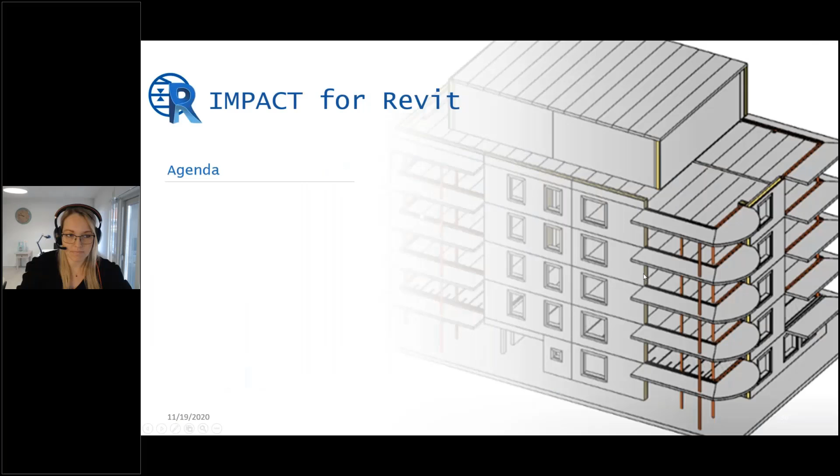So let's see what this presentation is about. We're going to start with the wall, the most popular precast element among our users in Impact. This time we're going to focus on reinforcement in Impact Revit for walls, instead of modeling.

I guess a lot has been said about modeling already, we've been working a lot on it. Now we take it a step further and try to see how to ease the reinforcement part.

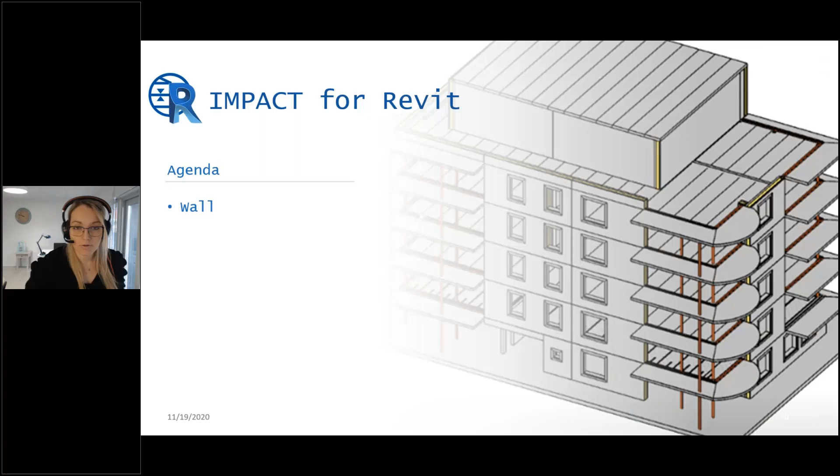We're also going to talk about the double wall. The double wall is what we called the last missing diamond of the Impact Revit crown. It was the last missing diamond.

But then back in September, we released modeling functionality for double wall. We continue working on it, and I would like to show you some highlights you might already be using when we talk about double wall functionalities.

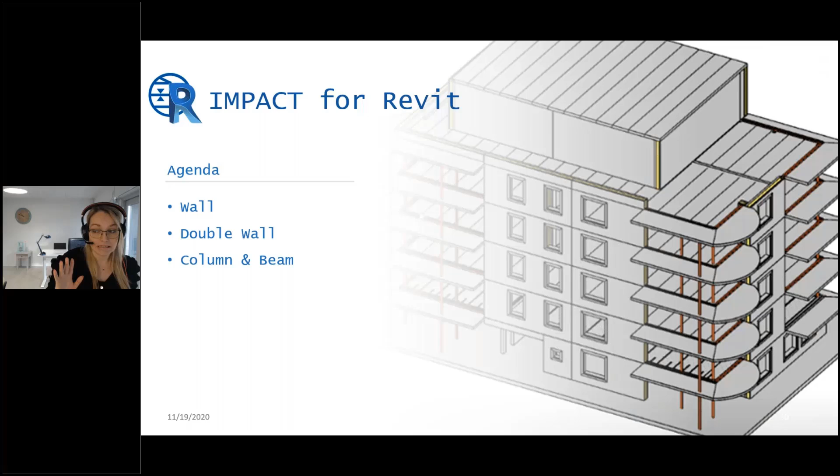We can, of course, not go without column and beams, and here I will show you a feature that a lot of you might have been missing. It's already there, and I'd like to show it to you so you can make use of it if you haven't found out yet.

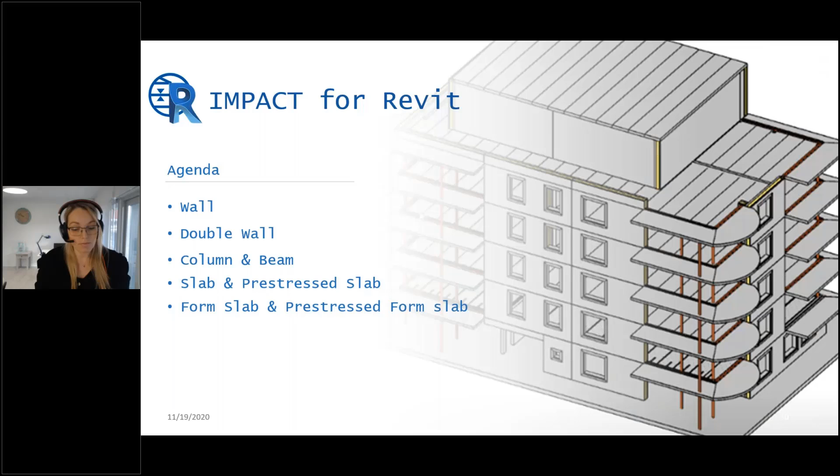Then I'm going to focus on slab, form slab, and their respective pre-stress versions. As quite popular elements, I'm going to talk again about advanced reinforcement possibilities in slabs and modeling. Those are elements that need to be designed fast and effectively, and we put a lot of effort into our functionalities there. I want to show you some highlights.

Yes, we cannot go without shop drawings either, an inevitable part of each precast model. So here I'd like to show you how to copy a shop drawing in Impact for Revit, a new functionality that came because of you. You asked for it, and we worked on it during this year.

And we're also going to talk about how to connect the shop drawing in Revit with the rest of the Impact software, for example, setting drawing statuses.

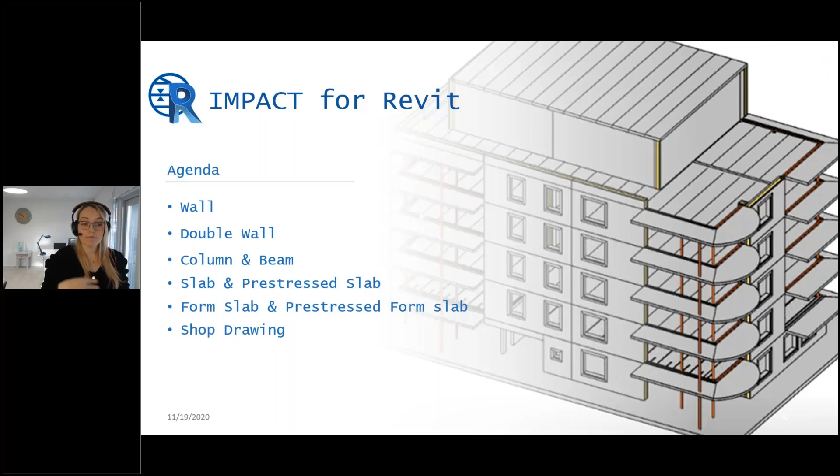Last but not least, collaboration is on our list of topics. I'm going to show you some tips and tricks about collaborating with Impact Revit models in Impact 16. In the end, we have around 35 minutes for this presentation, and we're going to have time for questions and answers.

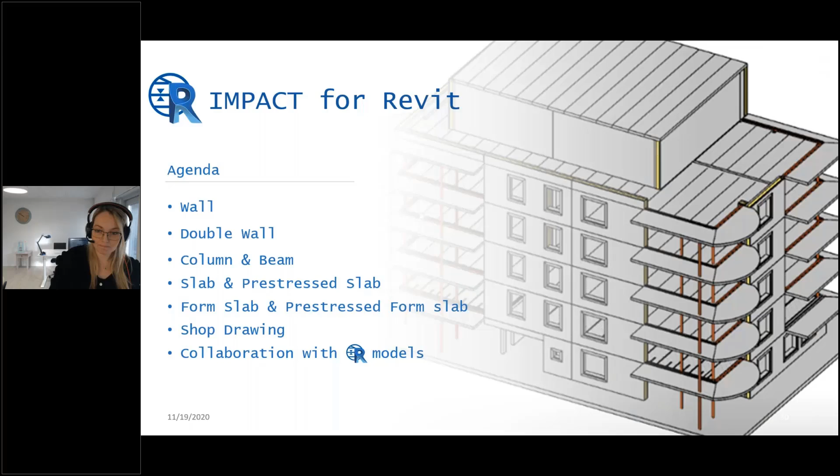But let's start, let's not lose time, and begin with the first topic: the wall. I'm going to rearrange my screen like this, and then we are ready to go. As I said at the start, this time we're going to talk about reinforcement boundary in walls.

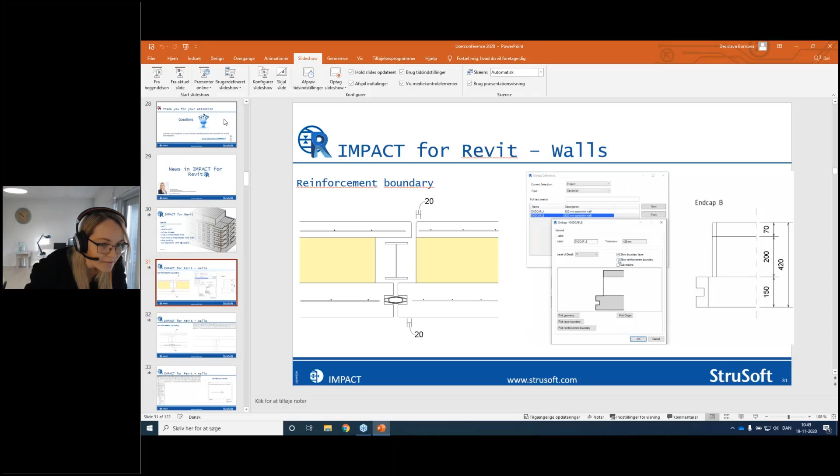There is some kind of delay. I don't know if you can see it on your screen, I'm going to try again like this. Now I think it's going to work.

The first topic I want to talk about walls is the reinforcement boundary. Let's see the problem a lot of Revit users face, which has a lot to do with reinforcement. I've taken an example with quite a challenging shape, but also quite typical for a precast element. We need to insert a place for insulation material, a place for a column, and adjust the shape of the inner and outer panel.

We need to stop the reinforcement 20 millimeters before the edges of the element, respectively the load bearing and the facade. What Revit users see as a challenge is that there are limitations in the Revit software, because you have cover settings, but they take the outer edge of the element, which obviously is not going to work in our case.

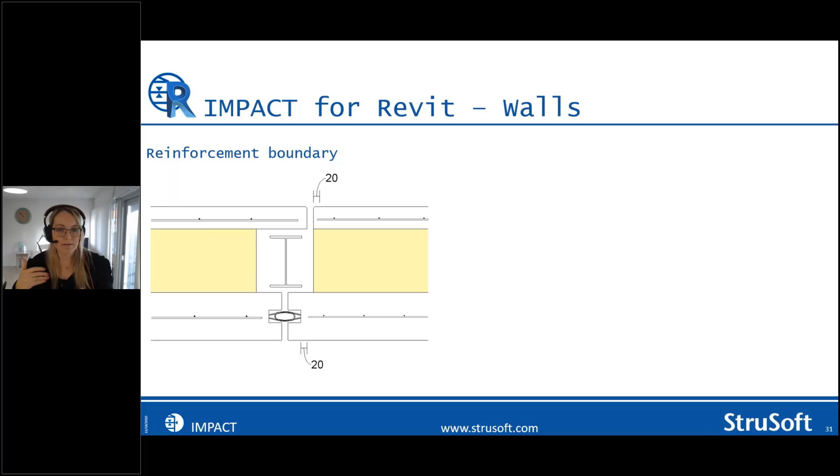So we said we need to optimize this setting of reinforcement and cover settings. We've done that a lot in Impact. Impact for CAD has history for solving this problem with reinforcement boundaries, and this is what we also implemented in Revit, seen with the Revit tools. Now we combine Revit tools with Impact tools.

What we do is, of course, make an endcap - that's the shape of the wall. That's one of the most powerful tools the designer has in Impact. We make the edge with the help of the endcap, and here I have endcap B, as I call it.

What I can do is define the thing called reinforcement boundary. I can say that whatever reinforcement from the reinforcement templates in Impact, they can stop where I decide - in this case 20 millimeters.

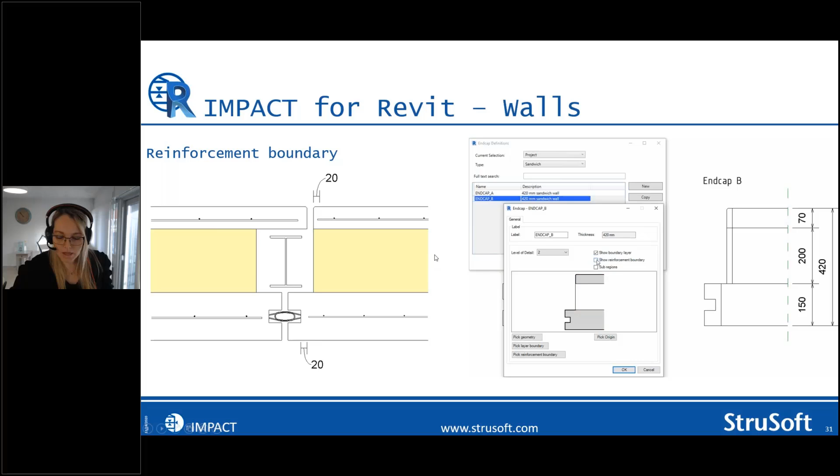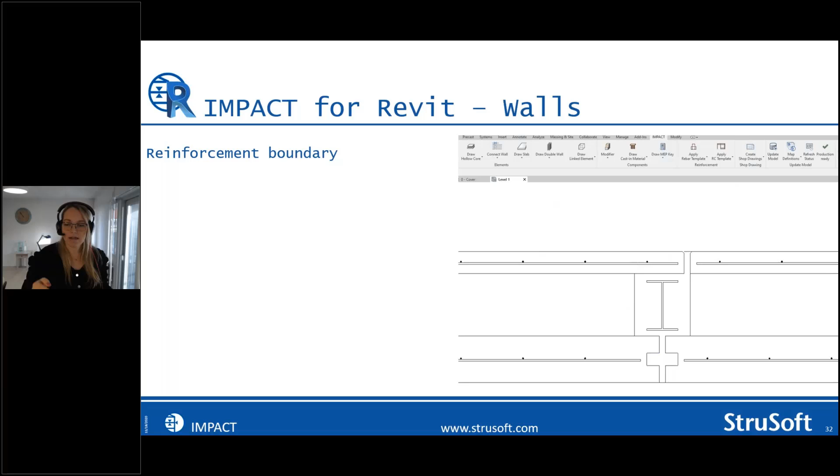So once I go and define the reinforcement template, I can just apply it. It's a template that consists of a mesh, edge rebars and opening rebars. Then you can see that's the result - it's going to adjust to the shape that I have given. It's going to look like this.

If we see from a top view, it's a see-through view, so we can see the casting material, we can see the mesh. And in Revit, as a visual software as it is, we have a lot of possibilities to measure, but also to adjust according to it.

One of the great parts about this reinforcement template endcaps - you can also do a casting material template - is that it all can be saved in your Impact database and can be reused from the database. If you already have them in your standards, in your Impact standard, you can also reuse them now in Impact 16. So try it out. If you have issues reinforcing or adjusting the mesh in a precast element, take and try this one, the reinforcement boundary.

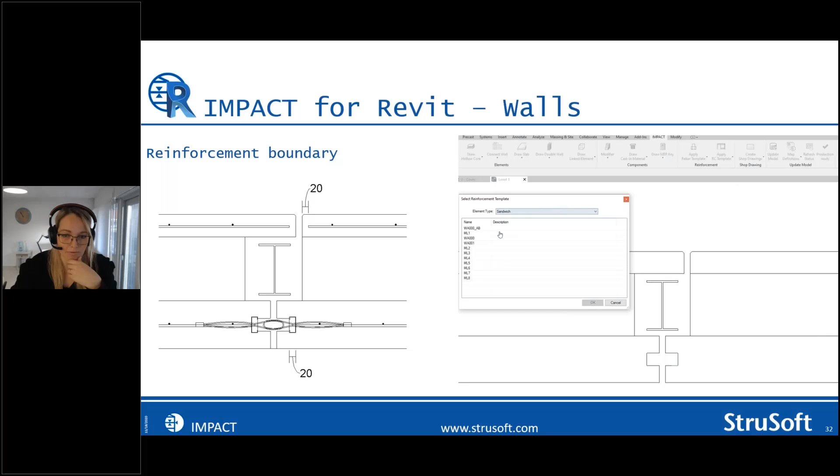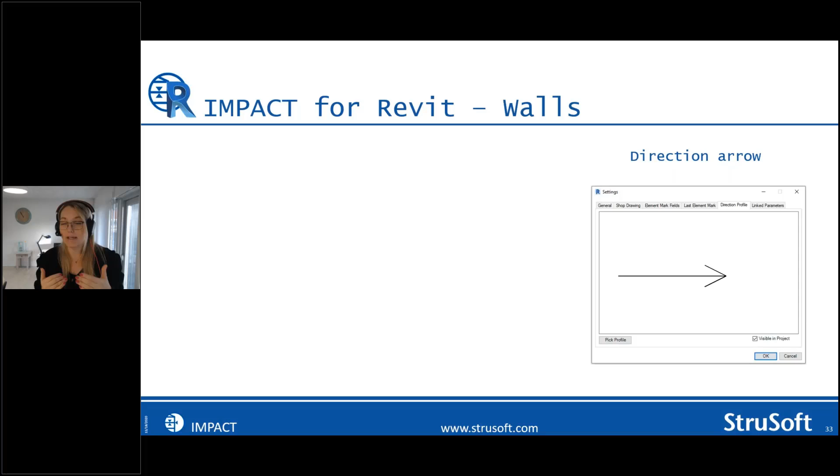Another setting which I know a lot of you have been waiting for is what we call the direction arrow. It's more like a visual guidance to where the sides of the precast elements are. Why do we need to see the sides of the element? It's because in Impact, we as designers need to know, to define from early stage, where the element mark, the name of the element, will be on our drawing. Because later on this will also define from which side we see the element on the shop drawing, but also how the element is going to lie on the precast bed. So for me as a designer, that's very important to know.

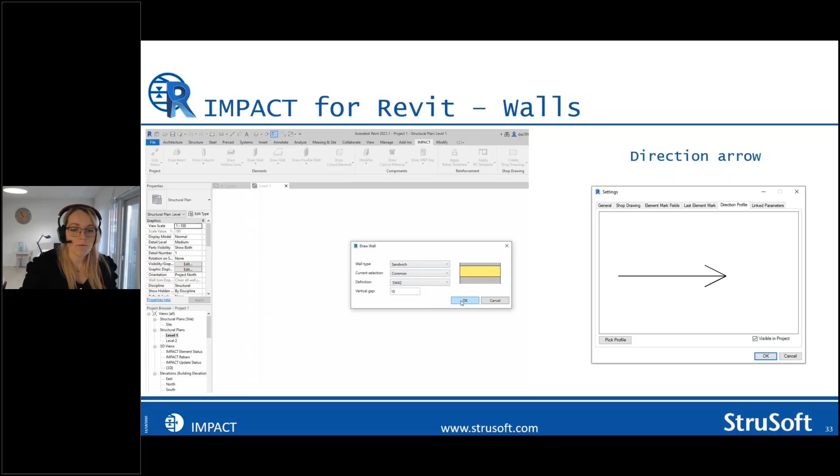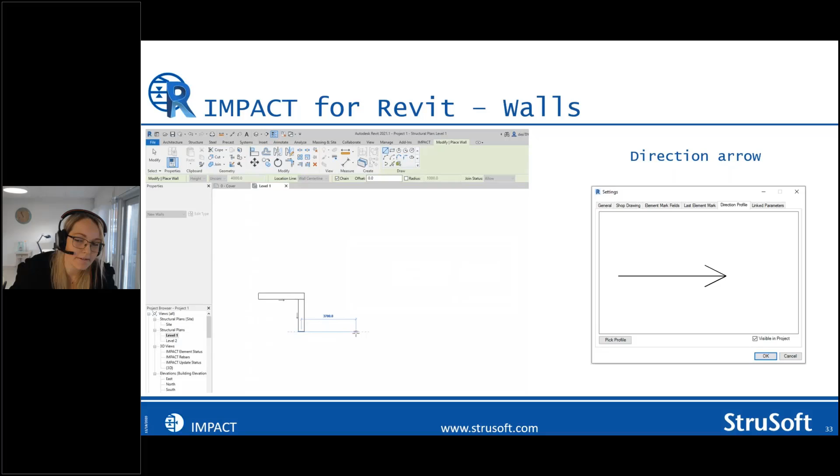You go to settings in the Revit file and you can decide your profile. You can pick whatever shape you want - I know some of you are doing rectangles, triangles, text. It's up to you. But you pick your profile, and then every time you draw a wall, what we're going to do now here in the video, you can see that you are not in doubt which is your load-bearing part, and where your element mark is going to be.

So I will jump to the next topic, which is the double wall. As I said before, the double wall is something we've been spending a lot of time on this year, and we couldn't wait to come up with the solutions we found for you.

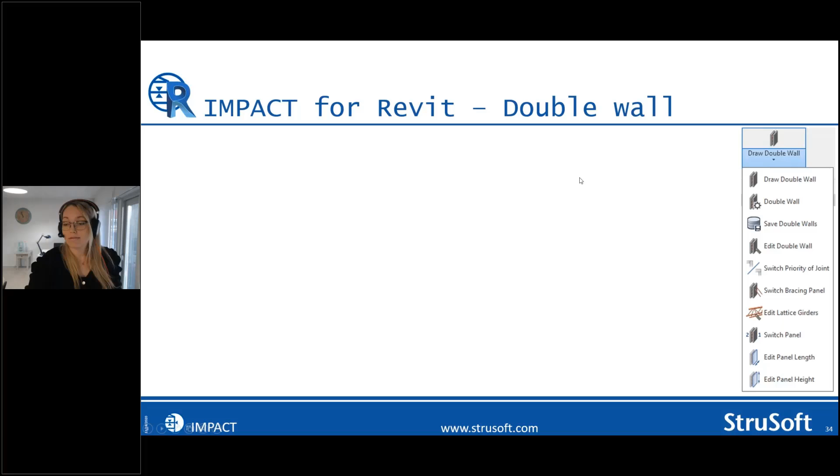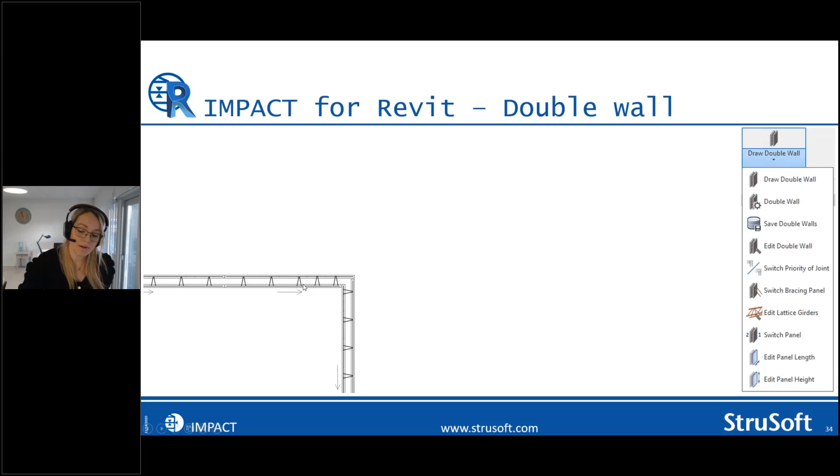Back in September, in Q3, we released what you see here on the right, the first functionalities of the double wall. These are modeling features. Revit gives us a very great visual presentation of the double walls. You can see, from a top view, that we have the two panels, the space between, and then the lattice girder families. If we go to the 3D view, we see the same elements, and we can also see the lifters here.

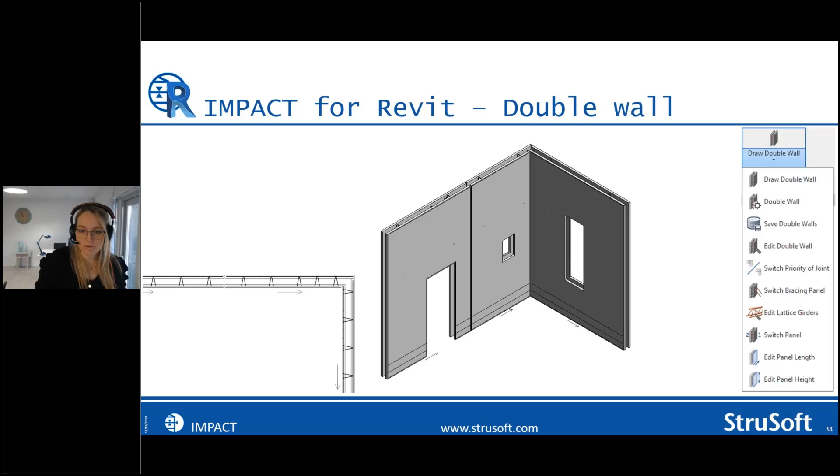You can make some see-through settings. It's great. You can also see here that you have the direction arrow in 3D view, both for double walls and all three types of precast walls. So it's very good for the designer to orientate where they see their double wall or wall now.

But let's see some of the highlights that we have. First of all, it's the drawing part, of course. This is the draw double wall window, and we try to make it as dynamic and visual as we can, and as long as we don't hit any limitations, we try to make it as easy for you as possible. So you can see the joints in the corners.

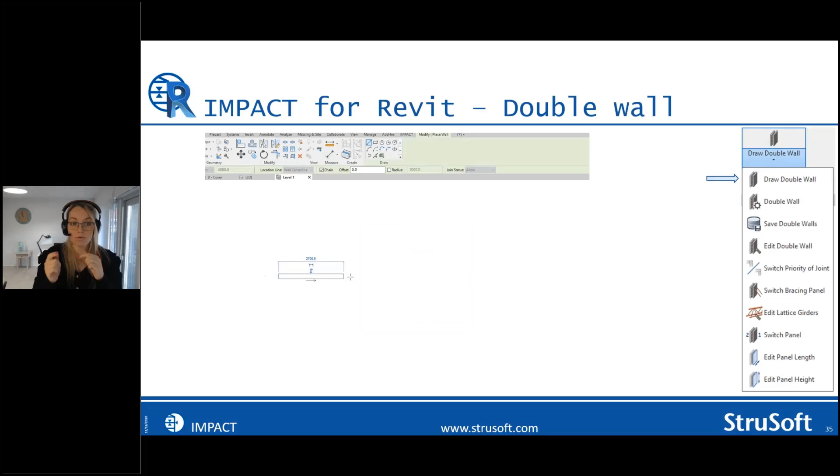Once you go closer to it, as we do here in the video, you can see how the lattice girder families are placed. You can measure the distance and see also how the reinforcement, in this case I think I have a mesh instead of rebars, looks. It's very visual to understand the double wall element.

But then, of course, once you draw, you need to edit, and we provide some modeling tools. One of them I want to demonstrate now: it's the one we call switch priority of joints.

So here we have a tool that you can either switch the outer panel joining, or you can switch both of them at the same time. So you decide which panel drives the other.

And if you notice, there was a place where we had one lattice girder going red. And then you say, what does it mean? It's a kind of warning from Impact to the user that we incorporated into our system.

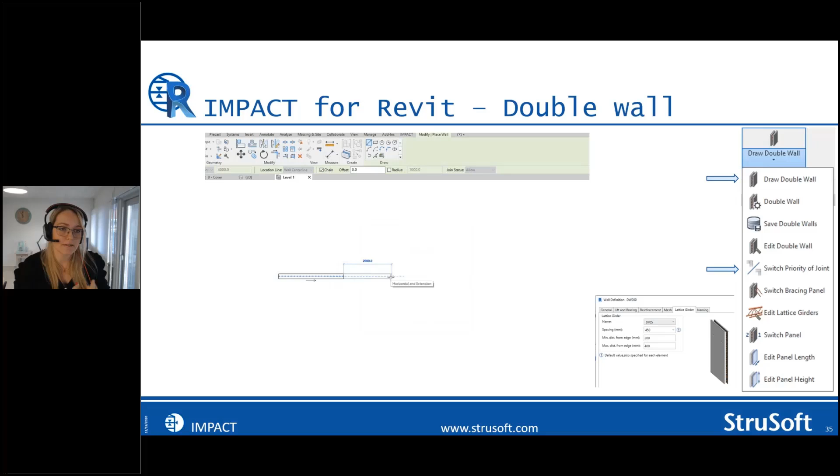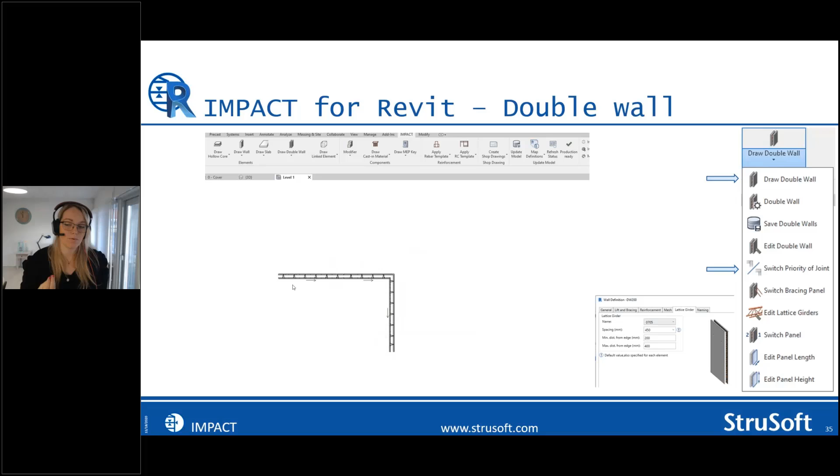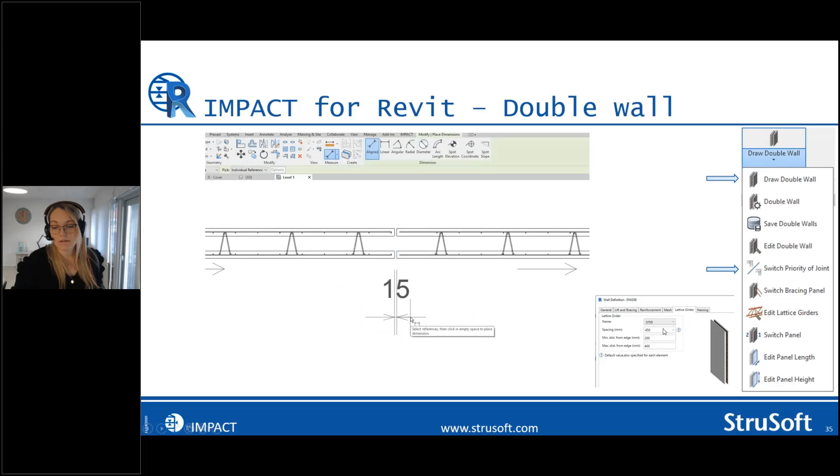So in the double wall definition, it's again an element that has to be designed fast. We need to go fast with the modeling part, and a lot of settings we decide in advance, like lift and bracing, the geometry of it, reinforcement mesh, but also the lattice girder. We can decide the lattice girder family, the spacing between the girders, and also the minimum and maximum distance from a lattice girder to the edge of the element.

Once Impact finds out that these requirements are no longer satisfied, you get a red warning - a red lattice girder. What to do with it is up to you. It might be your judgment as a designer that you want to keep it, you say it's fine, but you can also use the edit lattice girder functionality.

It's a very fast way: select the wall, and then a window like this comes out. Take a look at this - it's a window where you have the dimensions pointed out between the girders. You have a possibility to add a new girder, to move a girder, or to erase one, and the window totally changes together with the change you made in your element. So it's a pretty good presentation of how your element looks now.

Once you press and close, you've decided how your lattice girder is going to be placed. You will experience that Impact adjusts the lattice girders to the geometry of the wall. So if you have a window opening - we call it a recess in Impact - or if you have a panel that is a little bit longer, we're going to adjust the lattice girders to the geometry. You don't need to think about that as a designer. It has to be automatic - it is automatic, and it goes fast.

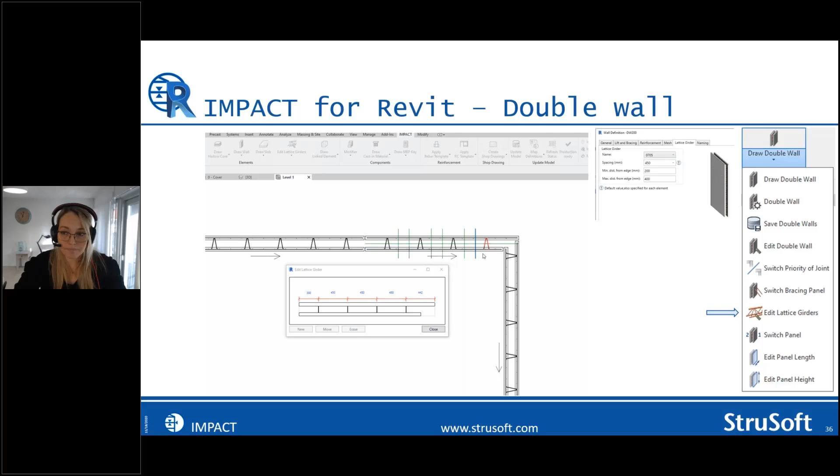These are the three features found now for double wall. We made a webinar about double wall back in October that you can find on our StruSoft YouTube channel. If you're interested to see what all those tools on the right are doing, go check the webinar or the Impact Wiki, which I'm going to show later today.

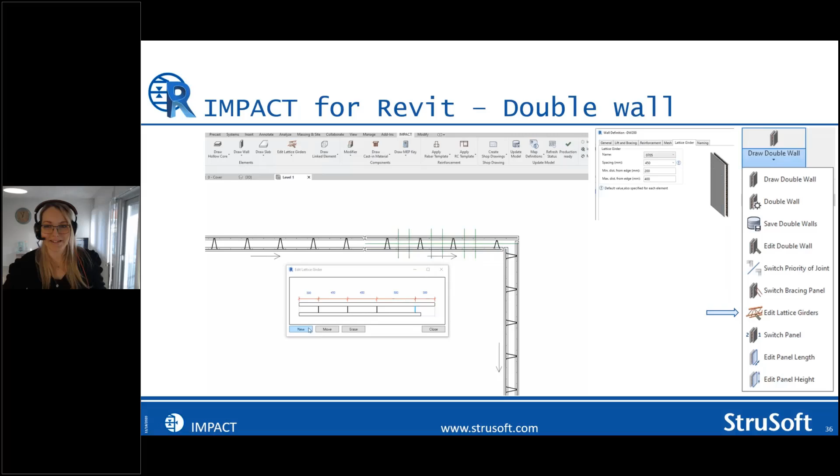Now we go to an element which I know a lot of you are using, that's the slab and the respective pre-stressed slab. I want to show you a feature about reinforcing the slabs. Here I've taken an example that could be a balcony.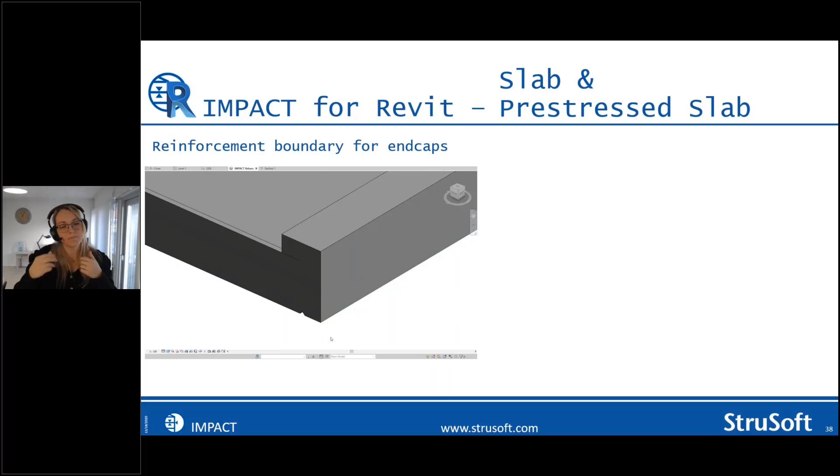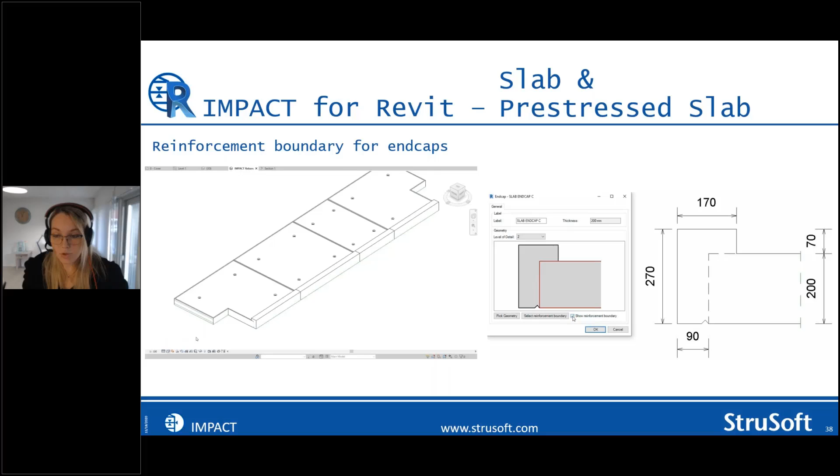So we have again a kind of challenging shape, and let's say for some reason you want to stop the mesh in the element 90 millimeters from the edge. Could be a special reinforcement, could be a joint, any reason, but you want to stop the reinforcement. We provide a tool for that called the reinforcement boundary in the endcap of a slab. Here I've drawn the shape and the line that you see, and I switch it on and off in my endcap definition. That's the reinforcement boundary.

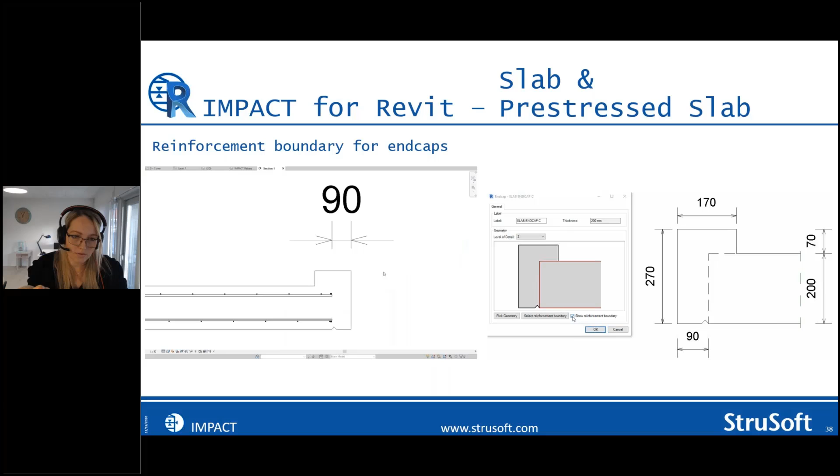Reinforcement boundary is valid for three types of walls: massive, insulated, sandwich walls, and then the slab and the pre-stressed slab. It's a very powerful tool that, once you apply the reinforcement template and apply a reinforcement, can immediately adjust the reinforcement according to the edge.

Now here we're going to another improvement that we made to our tools, and that's the edit slab command. First of all, in Q4, the release coming next week, we have added a possibility to apply a reinforcement template to a slab, just like you can already do in walls.

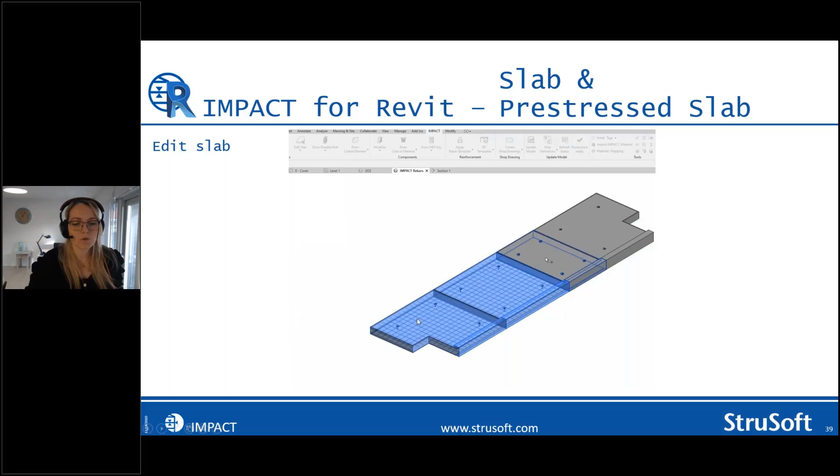But you can also see that I've selected almost 4 slab elements, and I can edit the edges of the slab, those endcaps, and I get this very visual editing slab tool where I, as a designer, can control very fast in this window which edge I have selected, and then once I select the endcap, I can see a preview of it on the right part.

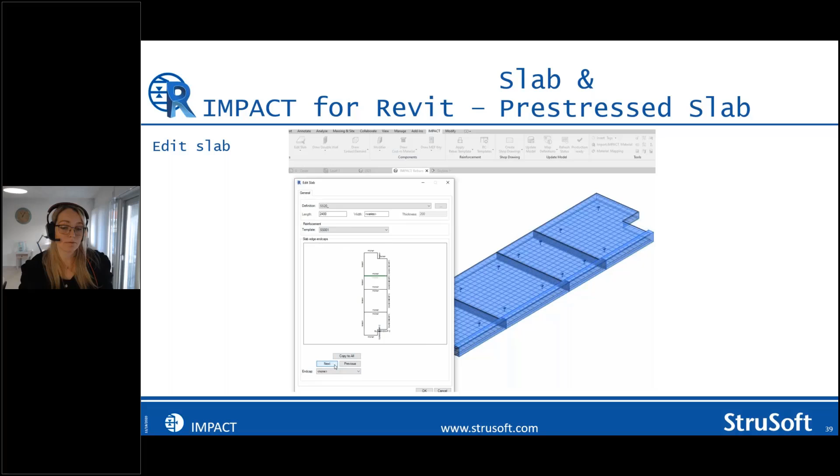So edit slab and edit pre-stressed slab - whatever feature I show about slab is also relevant for pre-stressed slab. I showed it only once, so go and try it and see how it works for you. We've also got feedback from users, and they're very happy about this new way we do it in Impact Revit.

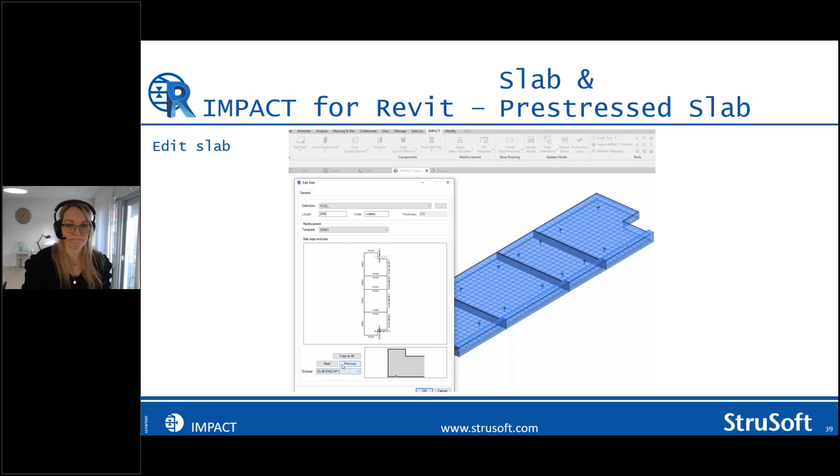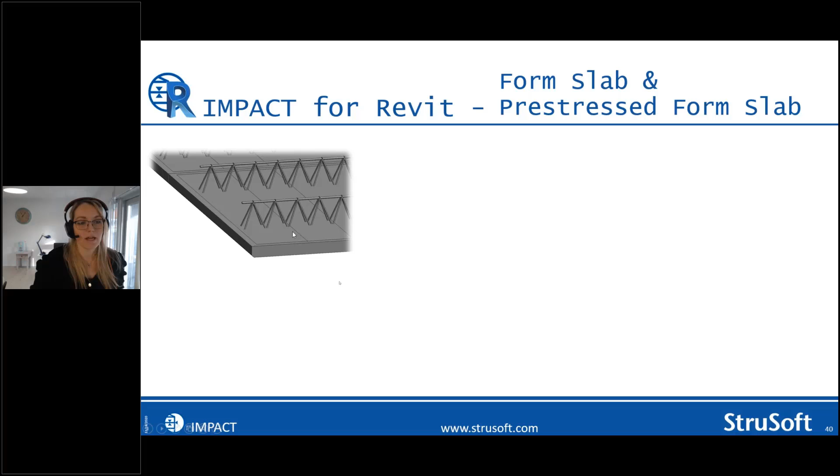Good, now it's time for form slab. Form slab is quite an interesting element. We have the massive part of it, the concrete part, and we have the lattice girder families again.

It's again one of the characteristics of this element that we need to design it fast. So already in the definition, we decide, for example, the edges of it. What I can do in the Impact Revit definition is now define the edge of it. What I've taken as an example in this definition is an edge between elements, which we call chamfer - here, 10 millimeters, meaning it has to be cut on the edge. This we can define already in the definition.

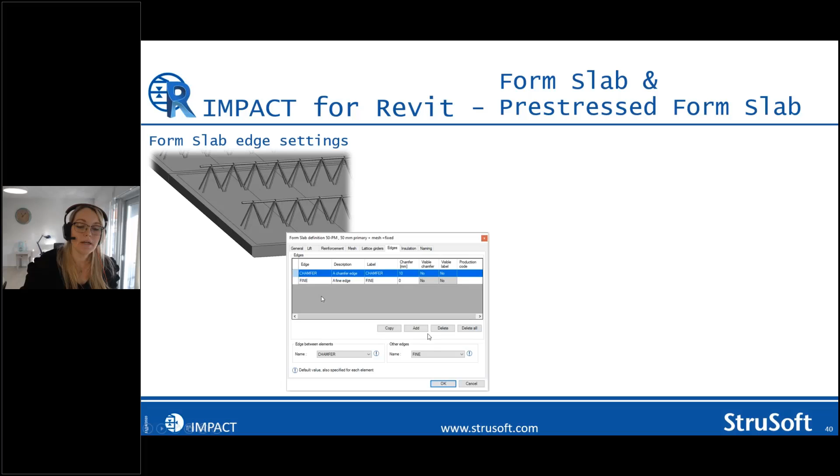And then I say that other edges, where I don't meet other elements, need to be fine. So what we did during this year is we worked on our draw form slab command as well, so that during designing the element, during drawing the element, you as a user are provided the possibility, according to the definition you selected, to go and choose the edge.

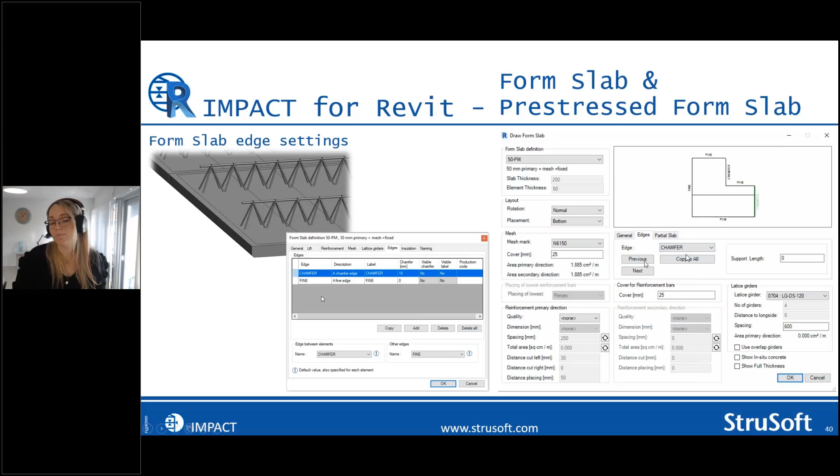So here in edges, I have a possibility. If you go into this tab, the software is going to show you the predefined edges in your definition, but you can always press previous and next, choose edge from the definition, say copy to all, or change an edge. The same is relevant for the support length.

And then, of course, we have a lot of other definition settings that you can also change during drawing the form slab. So edges is something we released, as long as I remember, in the middle of the year. If you haven't tried that yet, go and see how it works. It's a really useful tool to help the modeling go faster.

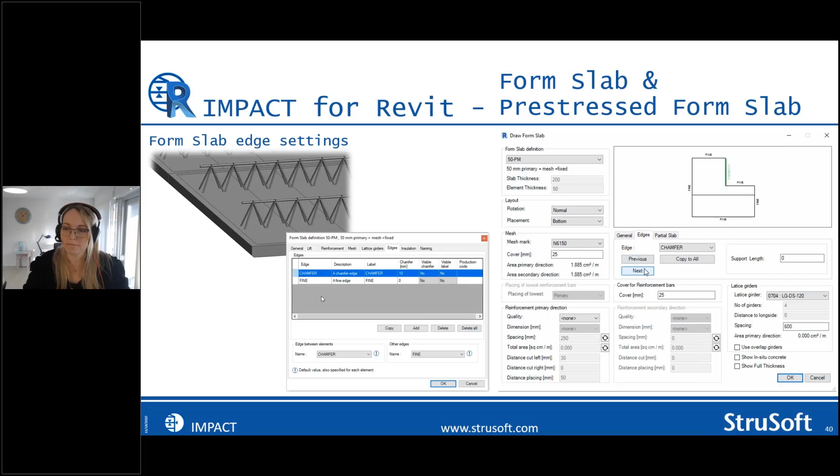I will stay a little bit more on form slab now, because of another thing we experience with form slab users in Impact Revit. We don't have in Impact language the word recess as in other elements. In slabs, we use recesses. In form slabs, we say holes.

So when you draw a hole, sometimes, as it was before, you need to draw the hole, and if you're not satisfied with the shape, you needed to edit the shape or edit the hole. It was a process that was taking time.

So what we did is utilize the Revit API and open up drawing hole with adding values in the drawing process. Here you can see they use the Revit tools. Now if I draw a recess like this one, and say it has to be 200 millimeters, I can define it as 200 millimeters during the drawing process.

And the same if I go and draw a shape that is a little bit more challenging, you can take the outer edges of the element as a reference. You can always decide if you want to cut the lattice girders, if you want to show the hole and specifications, and if you want to retain or delete the objects.

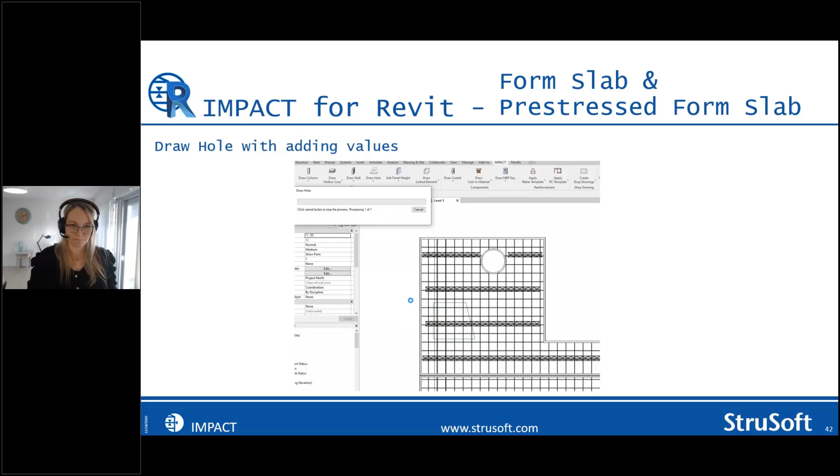Good, we're jumping now to the shop drawing, which is an inevitable part of the precast process, and it's a process where we are very pressed. So we thought this year, what can we do to save time when drawing Impact Revit shop drawings?

And you actually gave us the answers. Can we copy the shop drawing? Yes, we can. We did a functionality that can copy a shop drawing from one assembly, that's an element in Revit, to another. Here is the pulldown menu, where you can find a lot of functionalities about shop drawings in Impact for Revit.

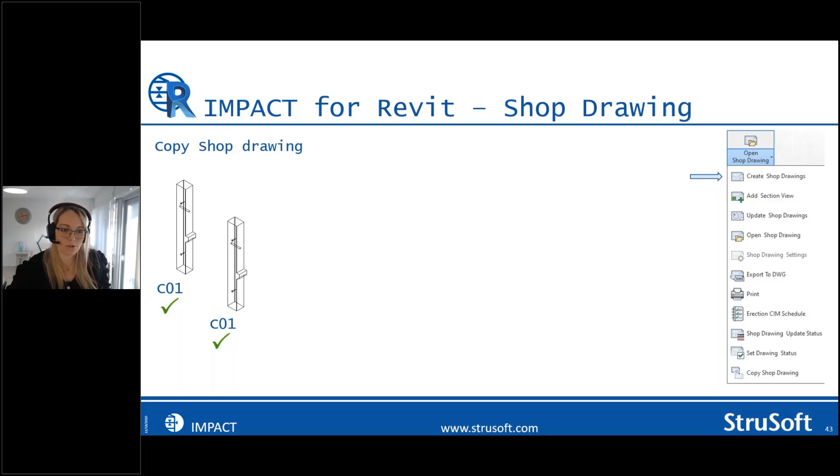I've taken an example with 2 columns here. Let's say we have 2 columns that are totally identical in terms of geometry, components, reinforcement, and we press on Create Shop Drawing, the first functionality on our pulldown menu. What we have in Impact is a great feature that creates the same shop drawing for 2 identical elements. The shop drawing is going to be called C01, and so is the element mark. Later in the production process, you can easily differentiate between those 2 elements because they have different IDs, but now we have a shop drawing for 2 totally identical elements.

It happens often that later in the design process, we have another element, a column or beam or wall, that is identical but with a small difference. Let's say you need to add a cast-in material, slightly different reinforcement, different lift, whatever. But there is one difference that you as a designer can control.

What users experience is that they spend time on shop drawings as it is now. On this shop drawing, it might be that I've moved the views, adjusted some dimension lines, added some manual text, added a detail, anything. I've used, let's say, 20 minutes for this column shop drawing. And when I have a similar element, and I know as a designer there's only one difference, let's say cast-in material, I don't want to spend the same 20 minutes again.

So that's where you can go and choose the copy shop drawing command. The new element is automatically going to be given a new name, a new assembly name, first by Revit and then by Impact. It's going to be called C02 because there is a difference, might be just 1 millimeter, but Impact Revit is always going to recognize a difference. That's a kind of security for you as a user.

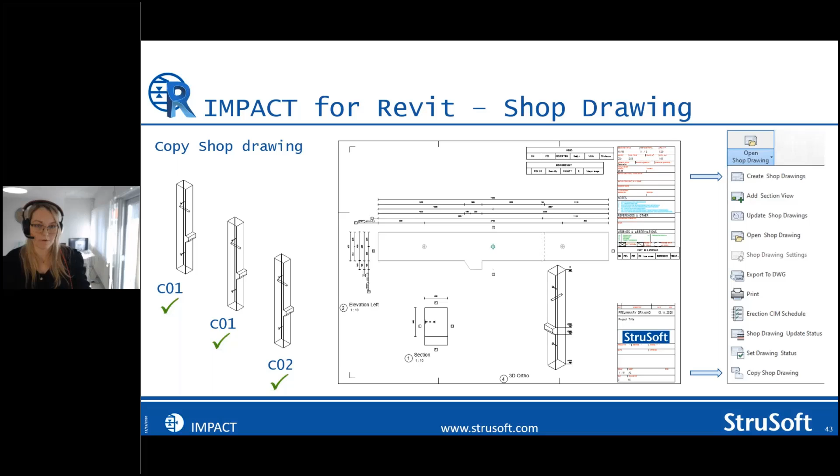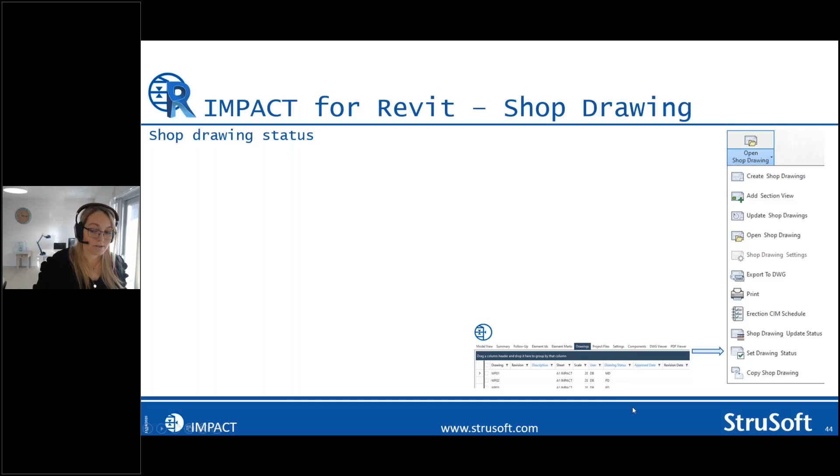And I want to round up the shop drawing section with a functionality called Set Drawing Status, which is also new for this year. If you work with our great production tools and Project Manager, then you know that in Impact Project Manager you can set the shop drawing status of a shop drawing, and that's a great way to communicate between design, production, and precast team.

But what we did this year is connect Revit, Impact Revit, with the rest of the Impact software. So all those statuses come from our Impact Standard. They're set up in Impact Standard Admin, once the administrator of the company does it. In your case, if you use them, they're in your own language, or totally adjustable to company needs.

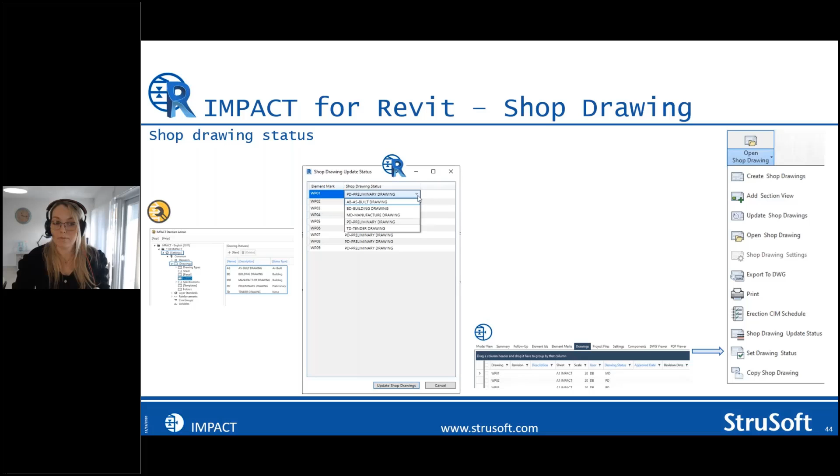What you can do now in Impact for Revit is, let's say in my example I have 9 shop drawings, you can already set a shop drawing status that is predefined in your Impact Standard. You can make this WP01 a manufactured drawing, from preliminary to a manufactured drawing. Next time you go in Revit and open the shop drawing, the parameter will be automatically updated to a manufactured drawing in your shop drawing head.

And you go to Project Manager, you update the project information, and WP01, the shop drawing from Revit, also has the MD drawing status.

All this setting up of Impact Revit with the Impact Standard Admin, and Impact, all these new features that were developed, we documented in Wiki, which I'm also going to show very fast at the end of my presentation. But it's a great tool for communicating and connecting the design in Revit with the rest of the Impact software. Again, very easy to use and navigate, automatically updating between the shop drawings.

It's automatically done once you open the assembly shop drawing, the element shop drawing.

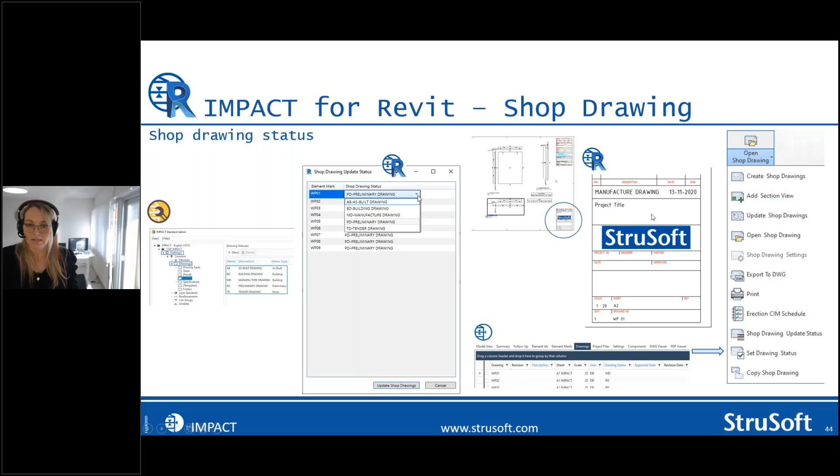Yes, good. Last but not least, I would like to talk about collaboration. This time I'm going to talk about collaboration between the Impact software. Now, a lot of you experienced Revit users attending today already know very well what the rules are within Revit. But what was important for us this year, and generally Impact 16, is to bring these collaboration possibilities to the next level, with Impact Revit models and collaboration, not only within Revit, but also in Impact.

If you have already installed Impact 16, you probably see that you have a section called Project Files. In Project Files, you have a Revit part where you can see all Revit files that are linked to your project.

Once you press on Revit, right-click, you can create a new project file out of the Project Manager, and you can give it a name, description, and decide the project template. You're going to choose the one that you have in your standard.

Here it's also important to mention that in Impact Server Connect, you all have that. If you use Impact, you can make settings for which AutoCAD software you can use, let's say which version, 2019 in my case, and which Revit version you use. This is useful because I know a lot of Revit users have at least two.

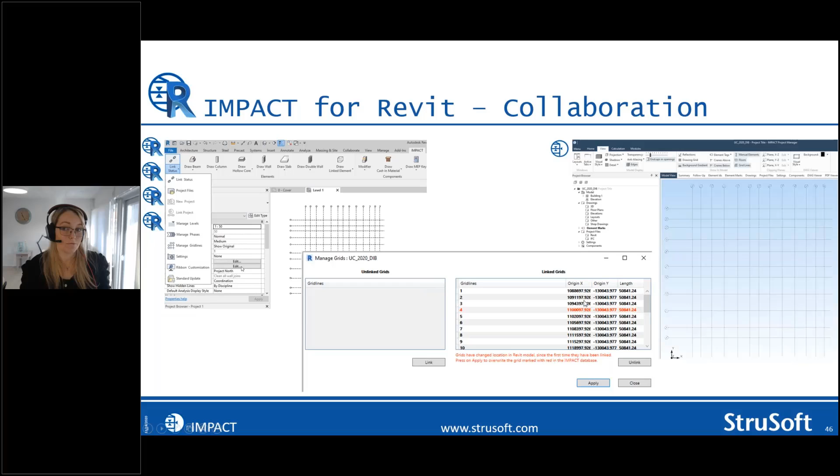So I know a lot of you are using grid lines, it's almost inevitable in our projects. So a new possibility here in Impact for Revit: use grid lines from several Revit models that are linked to one Impact project, and preview them in the project manager.